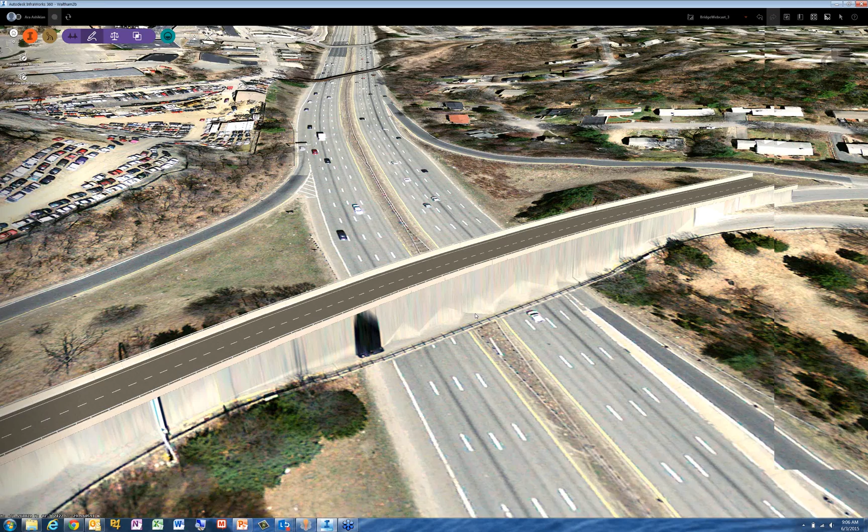So here we go, inside bridge design for InfraWorks 360. I'm going to switch over to InfraWorks now. Because of the lag on screen over the internet, I'm going to avoid moving around too much. Here is an InfraWorks 360 model. So what does that entail? InfraWorks 360 provides an in-context model so that you can see your project within the site model, aerial imagery, terrain elevation. You can also have LiDAR, all sorts of things to give you context. And we talk about it all the time, you design in context. Here, I quickly put a design road that's crossing this highway.

In today's presentation, let's have a look at what it means, or how do you actually model a bridge in context. So let's first of all select the road that's in front of us, and we will go to the toolbars at the top, and we have this bridge toolbar, and under the design mode we have two options. We can do precast I-girder bridges, or we can do steel plate girder bridges. Let's do a precast I-girder bridge, and you can hover over the road, and place the bridge where you want it to fit in the model.

So let's just drag it over, say something like this. Now, it's a rules-driven system, so when you place a bridge, InfraWorks tries to use reasonable assumptions that you as an engineer can modify, based on the span to depth ratios, which type of precast girder is suitable, or how many girders make sense, that an experienced bridge engineer would use. The model is in context.

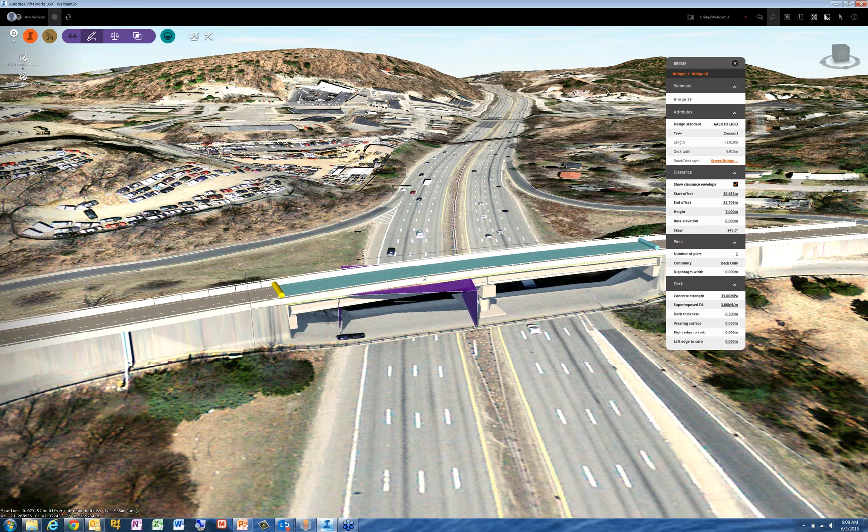Now, suppose we decide here that we want to actually have a higher clearance envelope for whatever reason. I'm going to change the clearance envelope, and in this case, we could go into the road, select the road, and change its vertical profile, or go in profile view and manipulate it. But we can simply click on the bridge and say, let's update the bridge's vertical profile so it respects the requirements of the clearance envelope. So here, this is just the starting steps. Let's turn that off for now.

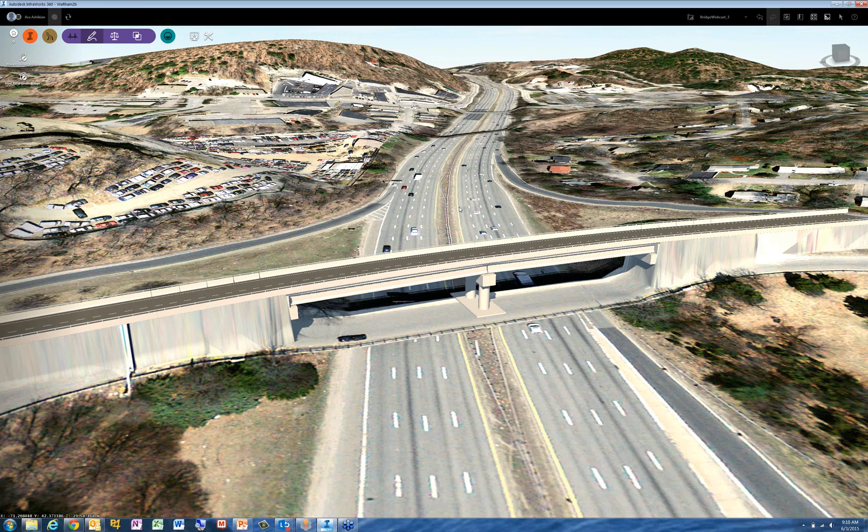Now, it's not just graphics. When we created the initial model, in this case, the default is precast I-girders. Let's toggle on deck transparency so we can have a better look at it. So we have a series of precast I-girders. If we want, we can go and view the quantities. So while you're modeling, InfraWorks is keeping track of all the key quantities for you. So if you change the number of girders, if you change the pier dimensions or layout, if you change the number of spans, if you change the type of girders, it's constantly recomputing all these quantities.

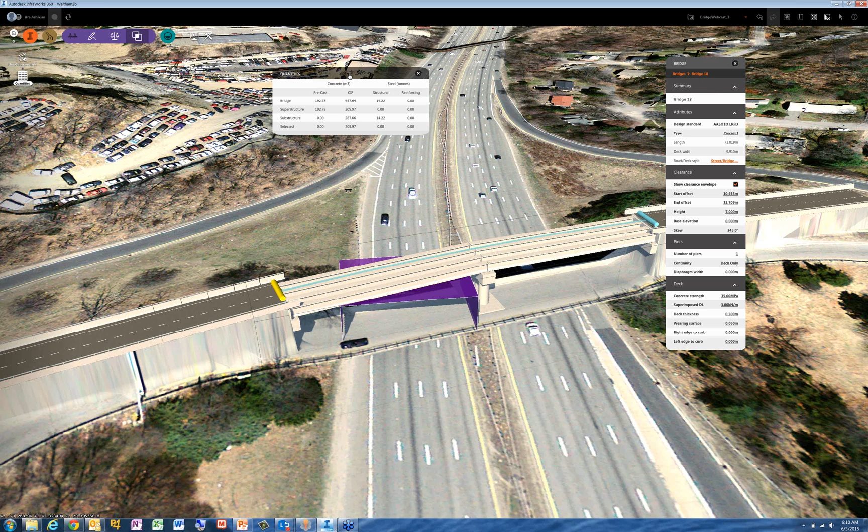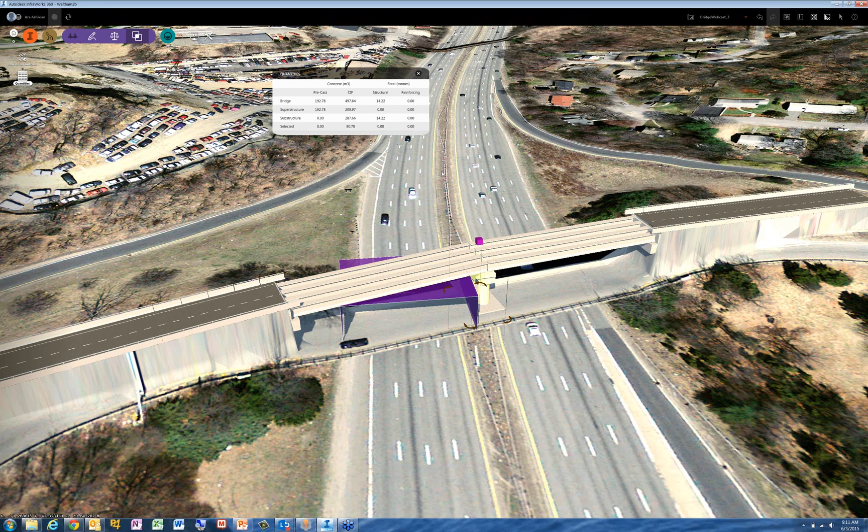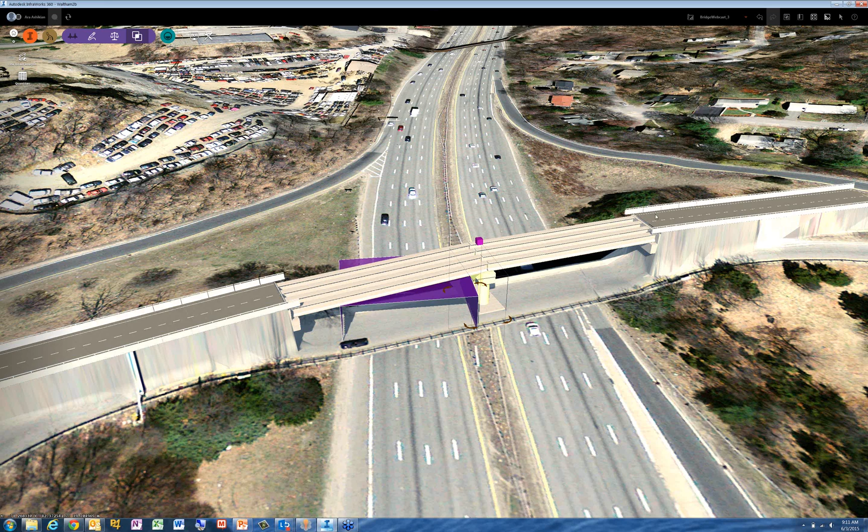So they're available for you, and they're divided into main categories: the precast versus cast-in-place concrete or structural steel, for the bridge as a whole, or for the superstructure versus the substructure, or if you select a specific element of the bridge, you can get its own breakdown. So that's always there, very handy. So you're modeling in context. It's keeping track of some of this information. It's rule-based so that a starting point is reasonable. So I'm going to turn that off for now. And again, let's turn off the clearance envelope.

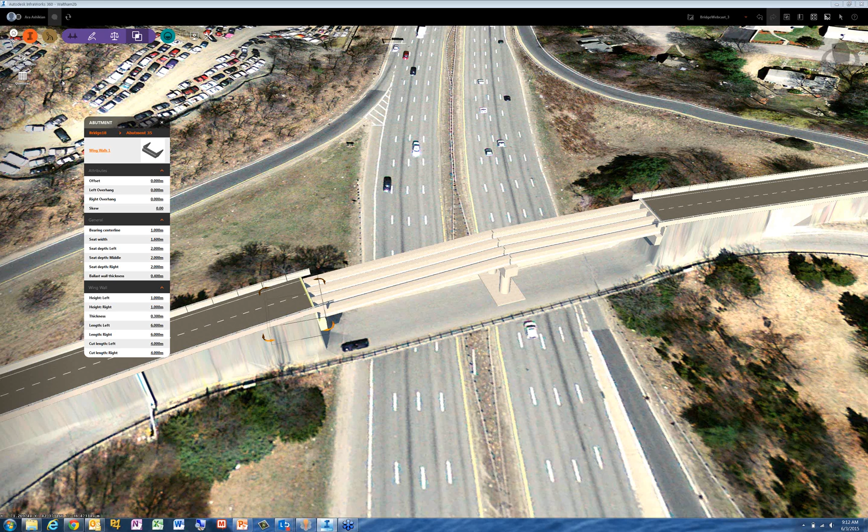And so here the pier isn't really quite where it should be. Or in fact, this first abutment, maybe we can pull the bridge in a bit. So once you place a bridge, you can always come back and manipulate it. So we're going to drag on this bridge gizmo and update the start of it. Let's also skew this abutment. In fact, this abutment is fully parametric as well. So if we were to put some terrain transparency on, we can see some of the abutment. It's a wing wall abutment in this case. Let's go in here and parametrically just change it a bit.

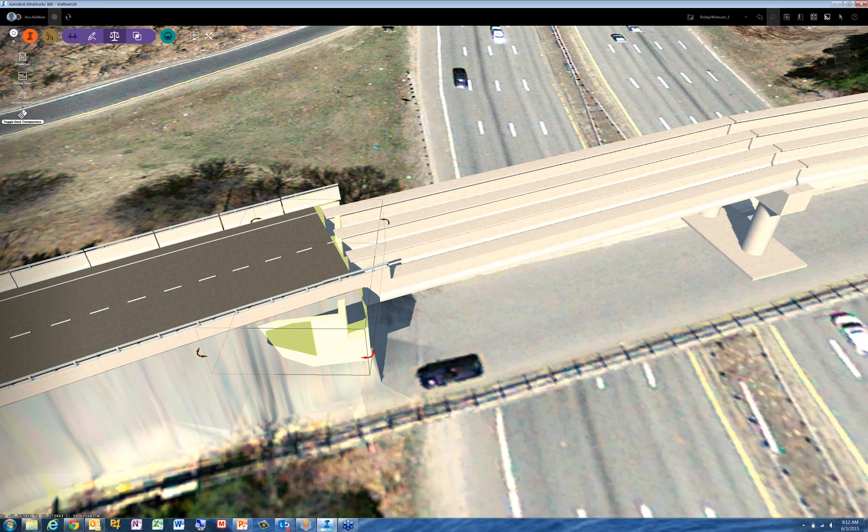In fact, we want to have an abutment that's acting as a retaining wall system as well. So let's extend the wing walls out a bit, and let's do that on both sides. So we can see the abutment a bit better now, and we can go in here and skew it so it aligns with the main road that it's crossing a bit better. We could also go in here and lengthen the wing walls. Let's say we make it 12 meters long on both sides, and let's make it go all the way down to the ground, so it's acting as a full retaining wall. So we could go in here and say it's something like 7 meters deep.

Now, an important thing to mention here is this is a parametric abutment, and we can click on it. You can see a larger image of it. But the parametric content, you as end users in the future will be able to add to it. So we have a product called Project Chameleon, which provides content at the moment in InfraWorks for all the drainage structures. In the future, it's also going to be made public so that bridge designers can add their own content, whether it's all sorts of abutments, piers, foundations, and many other bridge components. They all become fully parametric, and they expose their own dimensions. You as a content author can create as fancy as you want or as simple as you want, and you have full flexibility. So the modeling is going to be open. The in-canvas experience is going to remain, and you continue interacting with the model in an intuitive way.

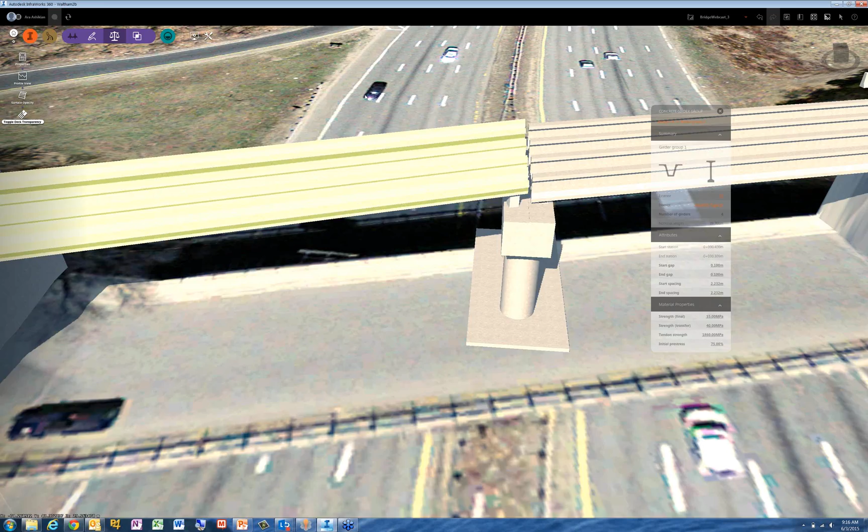Now, if we go on to the superstructure, we can see here the concrete girder group asset card, and it's indicating that by default it came up with an AASHTO Type 4 girder. You can go in there and you have a pretty comprehensive library of sections that you can choose instead of that. So if you wanted to have an Australian type of super T girder, you could switch to that. In different locations around the world, there are different common practices. I just switched the exterior girders to have this super T cross section. It could be something else as well.

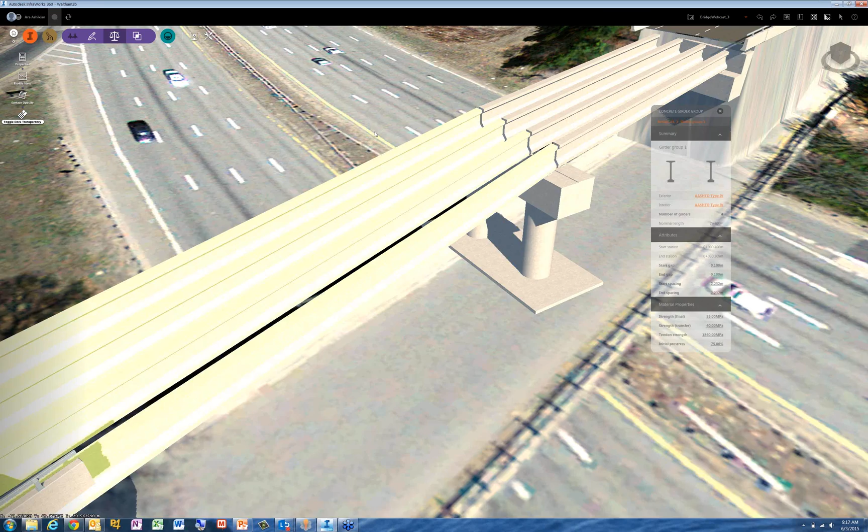So again, in the same way that you will in the future be able to add your own piers, abutments, and parametric foundations and so on, you can also in the future add your own girder geometries, and they will also be parametric. You can at any time undo what you did. So you have all those capabilities.

Also, when you select a girder group, you can select a specific girder and see its individual length. You could play with the lateral offset for each girder individually, so you can model more precisely what you're looking for, or at the group level, just play with the spacings between the girders.

Now, if we go to the bridge level asset card, we can play with the continuity of the piers. At the moment, it's set so that the reinforced concrete deck is continuous, but the girder is simply supported. So we have essentially two bearing lines over the pier. We could also say we want a continuous system where the deck and girders are continuous. Now we make that change, and it's going to update the model for us. We could keep it fully simply supported.

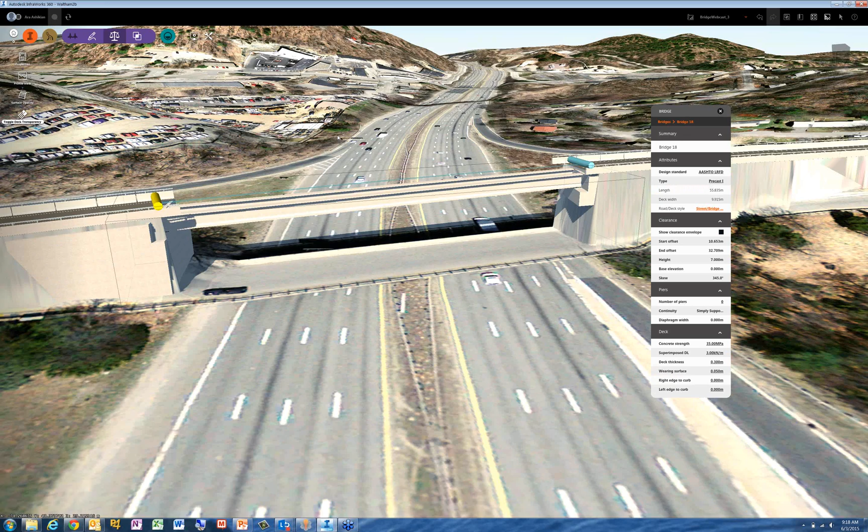If we were to delete this pier, it resulted in deeper girders and changed the girder size, so it respects a bit better the span to depth ratio.

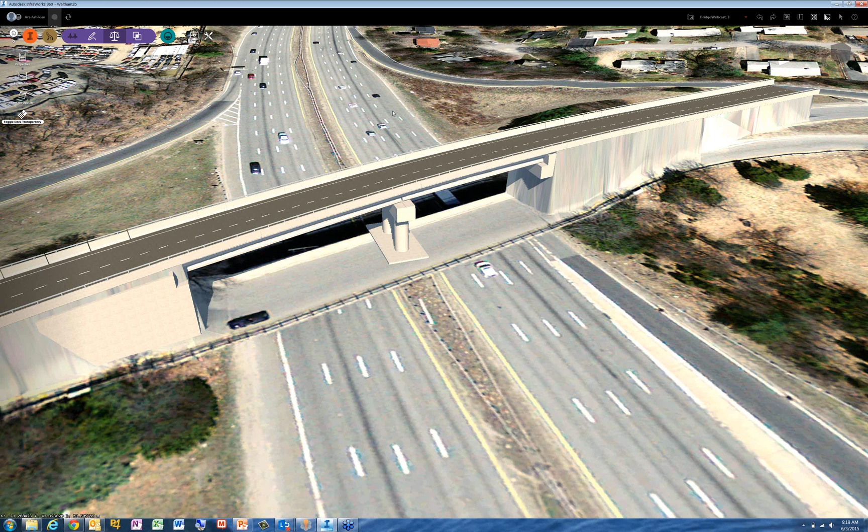We could also take this model into Civil 3D, the whole InfraWorks model or parts of it. In the last webcast, Charlie and Tim were showing how you can select in InfraWorks and have it exported to Civil 3D, where you can do detailed civil drawings. In the future, this same workflow will also be available so you can take this bridge into Revit. And in Revit, you would be able to do more structural drawings, construction details, add rebar to concrete components, and so on. So that's something that's coming up in a future release.

Now, we spent a few minutes here creating this bridge. We made sure it's tucked in nicely with the site. We looked at the clearance envelope. We looked at the abutments and skews and so on. And now it proposed different girder sizes based on reasonable proportions. And we can take that a bit further.

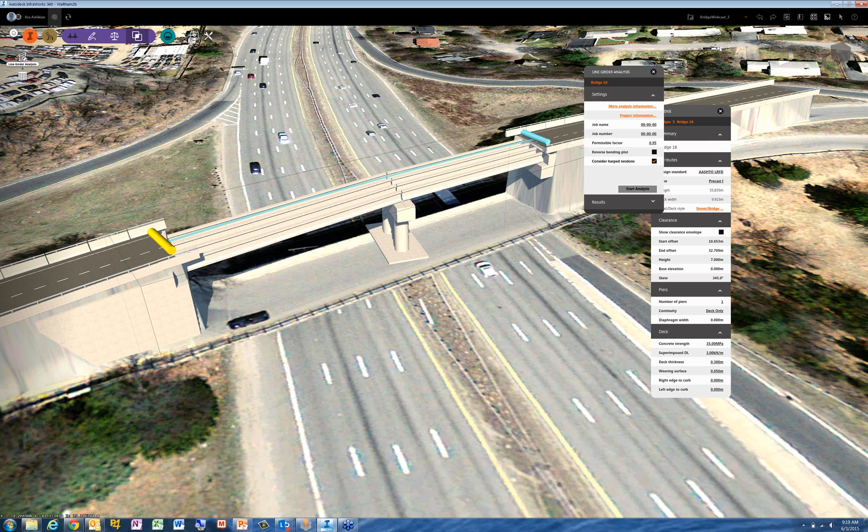If we select a bridge, we can go into this toolbar and this option called Line Girder Analysis. This is the first of a number of cloud services that we will be offering for bridges and structures in the future. What this allows you to do as an engineer is select your bridge and use the power of the cloud to do an analysis and code check to validate your pre-stressed girders.

Now, before we go straight into that, let's look at the bridge asset card here. You have different design standards you can pick from. This is leveraging a very powerful product called Autodesk Structural Bridge Design on the cloud. Autodesk Structural Bridge Design has been around for many years, and it's very well known for detailed analysis, design and code check of highway type bridges. And it supports a number of international design standards, including AASHTO and various Eurocode flavors.

So let's stick with the AASHTO code here. We select the bridge, and we can say start an analysis. This will trigger a cloud service, and it will look at all the girders at the same time in the cloud. When it's done, it's going to highlight all the girders. This line girder analysis is a beam line analysis. It's the first of many bridge analysis services.

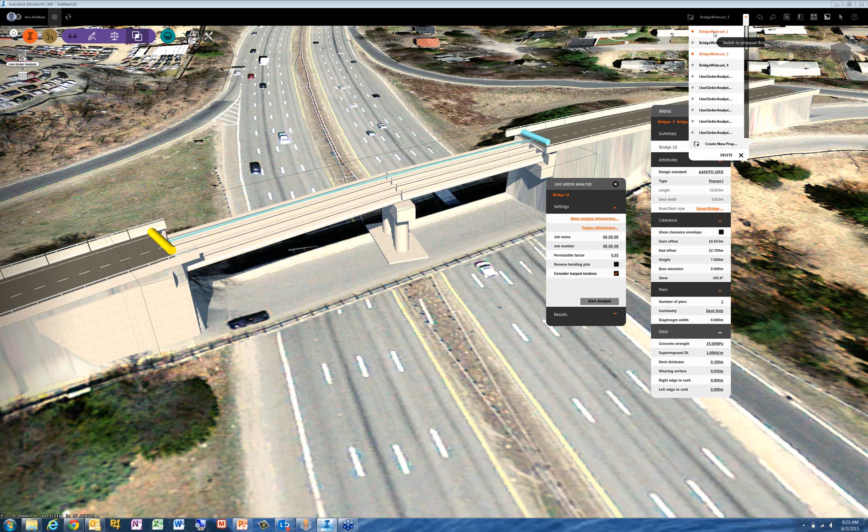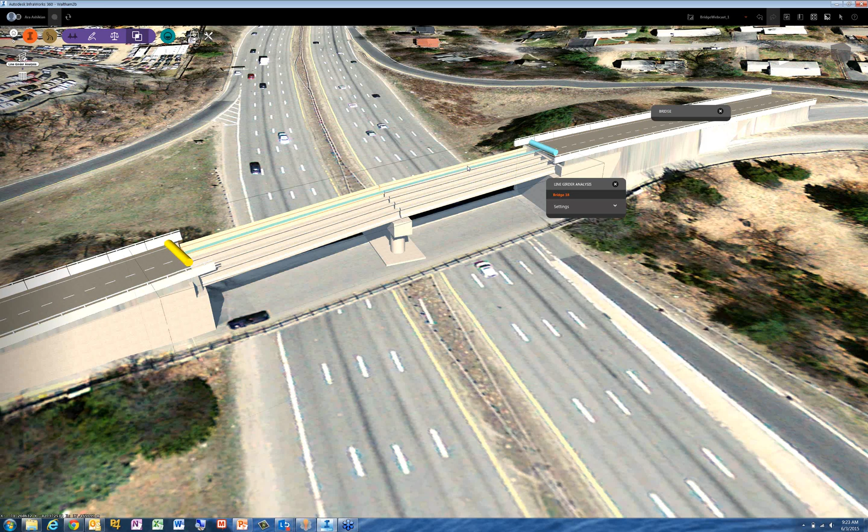Now, in light of the time and the fact that I have other things I want to walk through, I'm going to just pull up from a different proposal the same or similar bridge where I actually did run the cloud service. It can take 5-10 minutes or so on typical bridges, but here we have results. Now I'm going to rotate a bit more.

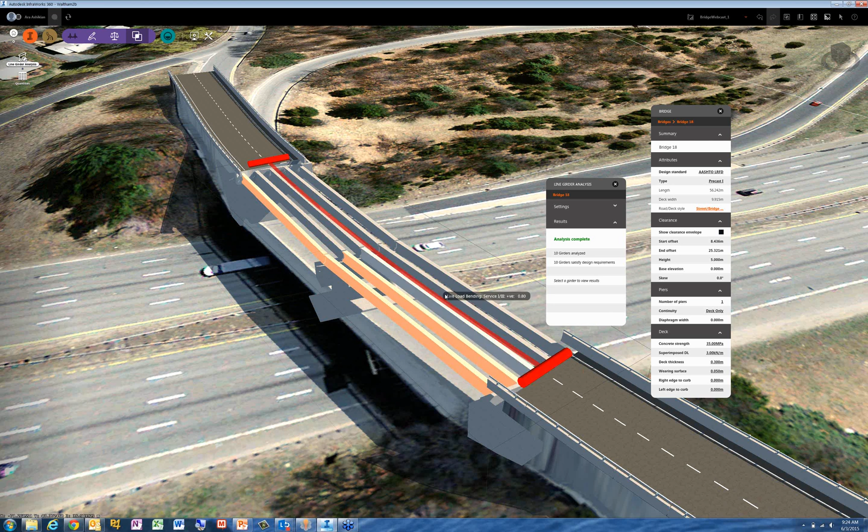You can see in this case the girders are color coded. If you hover over the girders, the results or the dominant or governing clause is highlighted. In this case, live load bending serviceability for positive bending is governing, and if you hover over all the girders, you can see. Now, if you were to select this specific girder, click on it, you would get this high-level summary of the design checks that it carried out.

So pre-stress transfer, erection stage, construction stage, that's in the casting of the deck, and live load bending, positive and negative, and so on, and the shear capacity. And this is what I was talking about earlier. You can go then just hover around, click on any specific girder, and view its high-level results, and make changes to the bridge. And when you're satisfied, you can go and get the full report. In the future, this will entail using cloud credits.

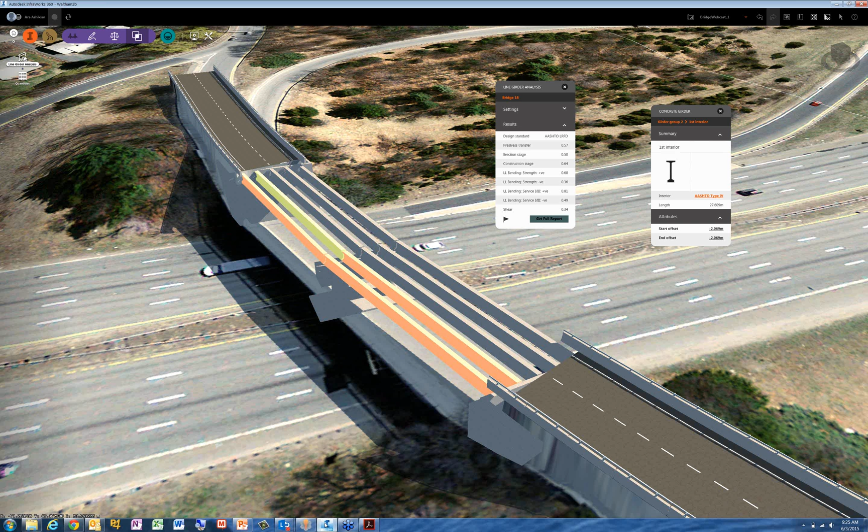For some reason, are you guys able to see the calculation report on the screen? It pulls up a... We just lost your screen. Screen is black. Yeah, okay. Oh, there it goes. It's back to InfraWorks now, right? Okay, here we go. So this is the report that it created. I guess GoToMeeting didn't transfer over to the PDF view nicely.

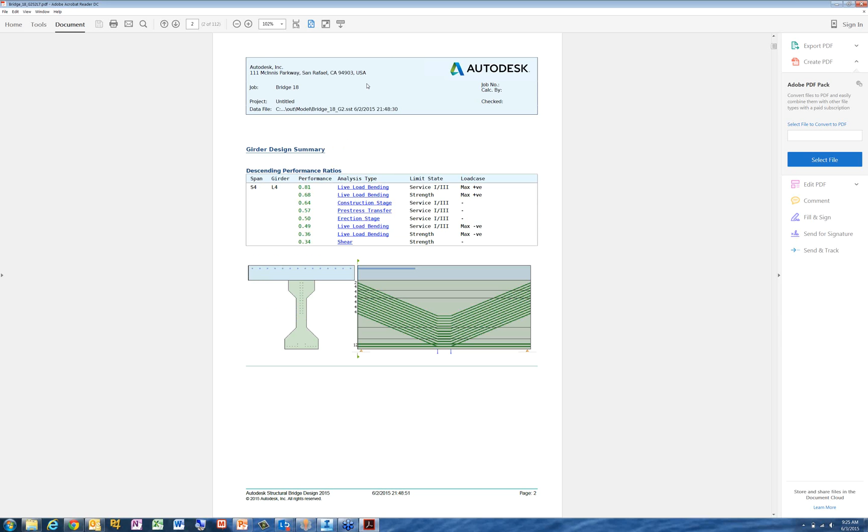So when you carry out line girder analysis, it creates a very detailed report. And you can see for this girder the pattern of strands that works, all the key stresses. And if you were to hover through it, you would see all the key diagrams, in this case live bending, and all the design calculations and clauses that were used in great detail. So all the equations that were used. So Autodesk Structural Bridge Design has very detailed documentation and you will get this for all the girders of the bridge.

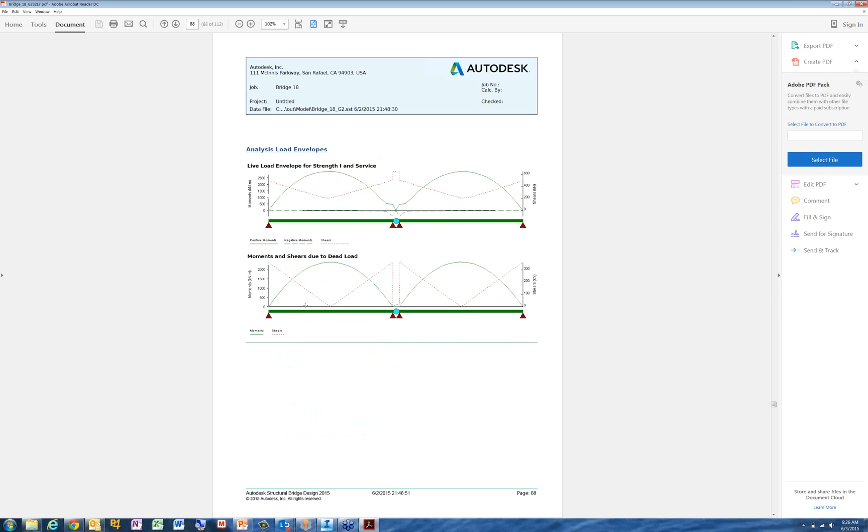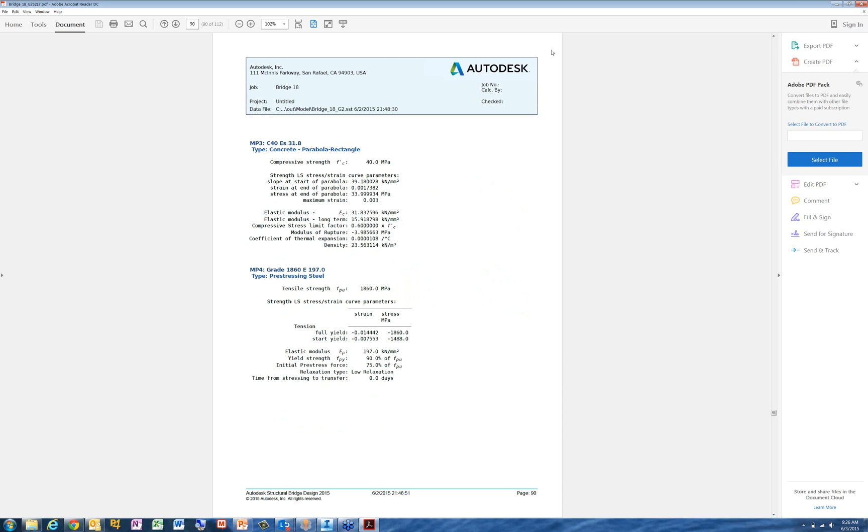You can jump over to overall diagram views or modeling aspects, how the line girder analysis was created, and save this with your project for future reference. When you create models in InfraWorks and you do line girder analysis, it will store this bridge along with its results once you purchase all the calculations in a proposal. So if you were to go back and make further changes to this bridge, you can always then access this previous run in a proposal by going up to the InfraWorks proposal menu and picking that.

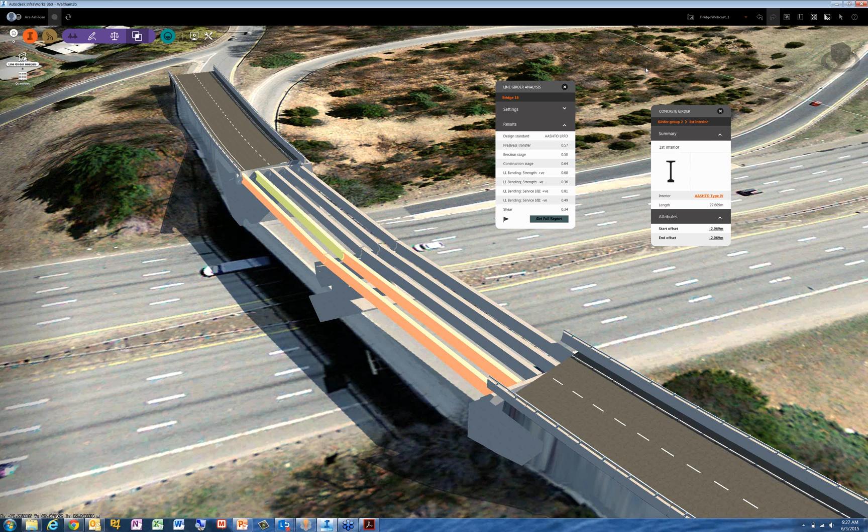So we really invite the users to try many different ideas, experiment, look at calculations. In the future, these cloud services will go beyond line girder analysis and include grillage analysis, so you have a 2D analysis of the deck system where you can account for effects of skew or curved in plan girders and so on a bit more efficiently than using design standards for lateral distributions. We will take that even further in the future with finite element models that we will extract from the InfraWorks bridges for more detailed assessments.

I'm going to close this off. So that's InfraWorks 360 as you have it in the upcoming June release, the current release. So it's the ability to design bridges in context, play with all the parameters of the bridge. I didn't spend too much time on foundations. You could play on with the foundations, change the number of piles, and so on and so forth, and get your quantities, get your analysis results.

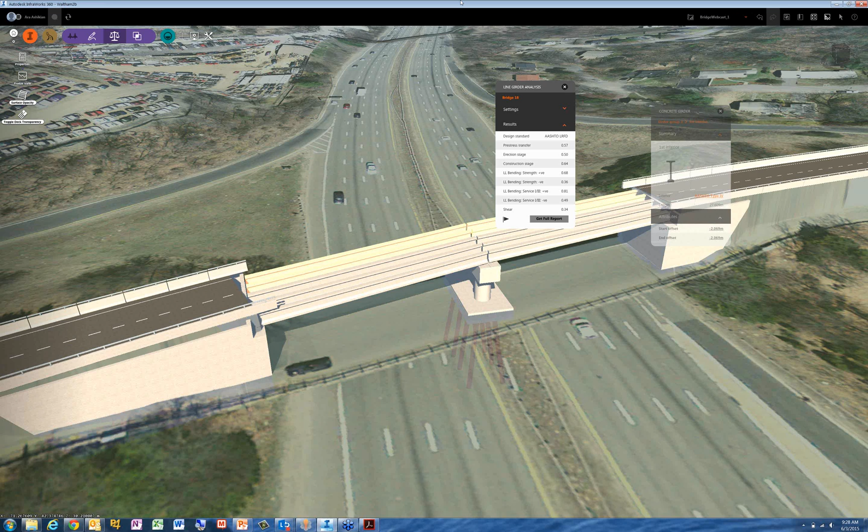And let's close this off. I'm going to load a work-in-progress version of InfraWorks just to show some of the things that are coming up, how we plan to extend this parametric modeling approach further with piers and foundations. And again, no promises as to the delivery of this, but we thought in today's presentation we would like to show you what we're talking about.

At the moment, the cloud service for the line girder analysis is for pre-stressed concrete girders. In the future, we will be expanding the steel girder modeling capabilities of InfraWorks and updating the cloud service for that.

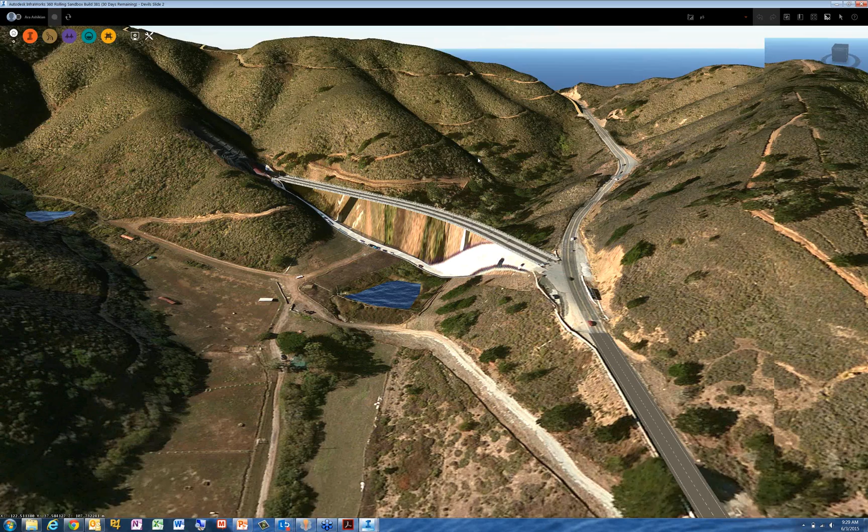So here we have a model of Devil's Slide in California. And let's suppose that we were lucky enough to win this project to design this bridge that's coming off from the Devil's Slide tunnel and joining the main road here. So let's zoom in a bit here. I just placed a road in here, and we want to add a bridge in this location. So once again, let's go into the bridge menu or toolbar, and in this case, let's try a steel girder bridge.

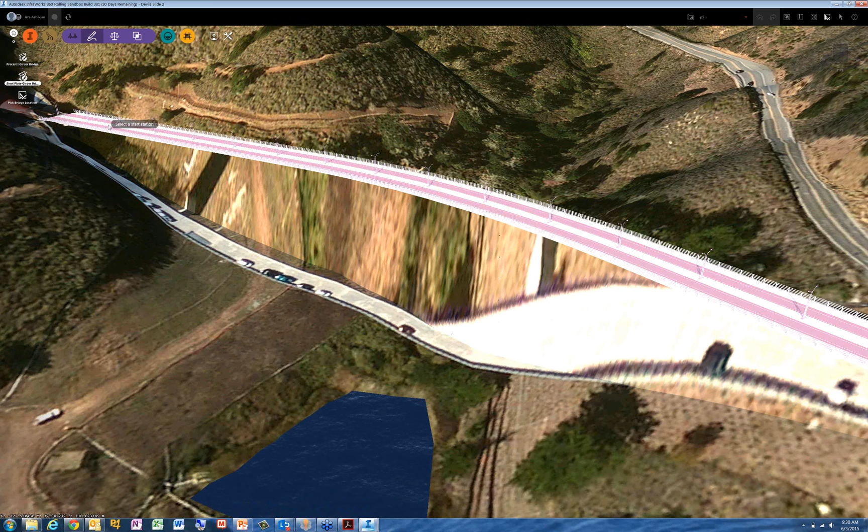So again, you just place it where you think it should go. You can always adjust the locations. So based on this bridge length of almost 250 meters, it came up with this configuration. What if we wanted to be a bit more daring?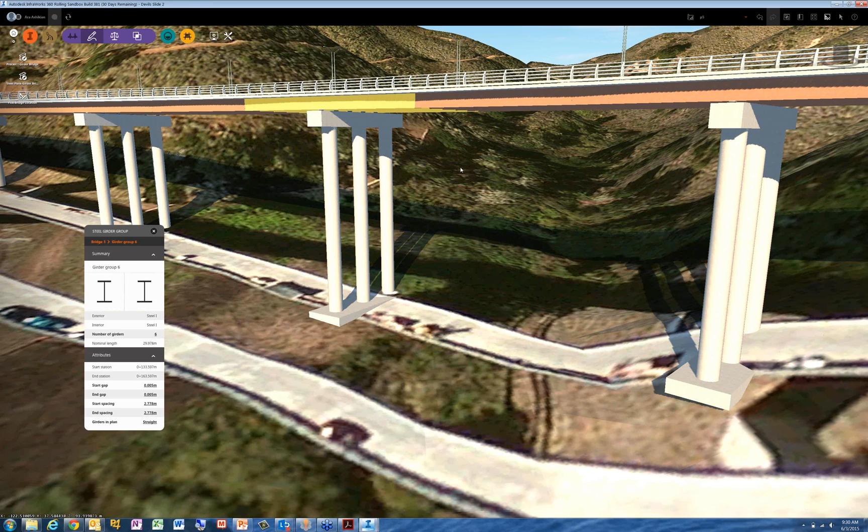Now, the steel plate girders, you can see they're kind of a weathered steel design, and they're continuous. You can see that you have different continuous segments over the piers and field splice segments in between. What if we wanted a more daring design with fewer piers? Let's say even just 2 piers. We can just go in and change the number of piers. Whoops, no, I changed the wrong asset card here. Hold on. Let's select the bridge and change its number of piers from 4 to 2.

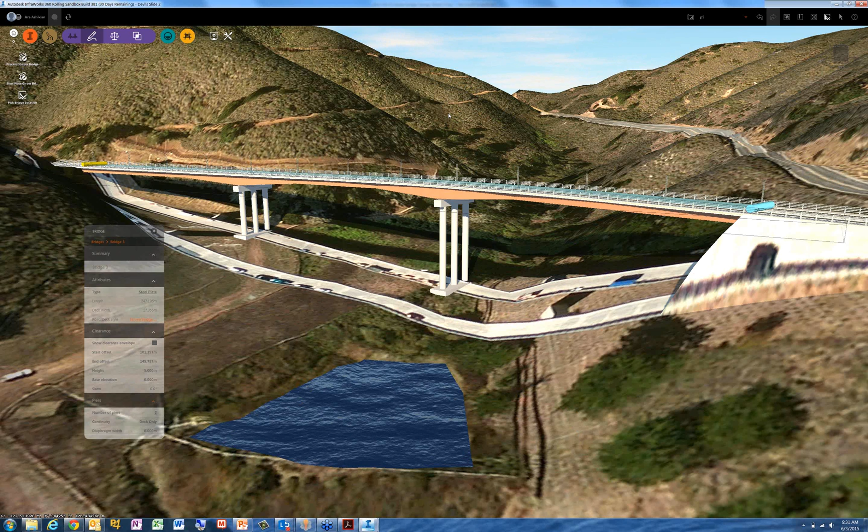You can see something interesting happen. The design rules behind the scenes recognize that for the corresponding spans, the user prefers to go variable depth plate girders when, in this case, the spans are over 80 meters. The default bridge that it creates has haunched steel plate girders. So you could carry on experimenting with steel plate girders.

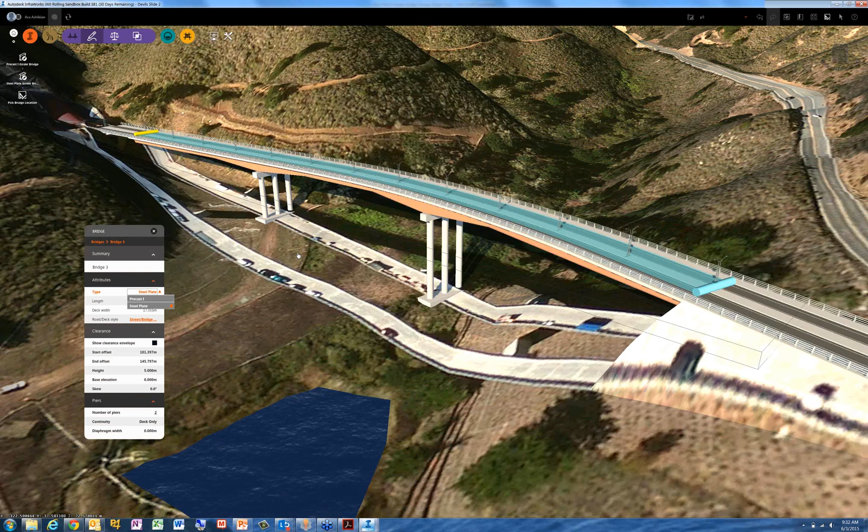You can go in here to the bridge asset card and switch back to precast I girders. There will be other bridge types coming up in the future. Today's versions are focusing on these. So here we have maybe a second alternative. So maybe you have a steel plate girder option, and you also want to consider a concrete bridge option.

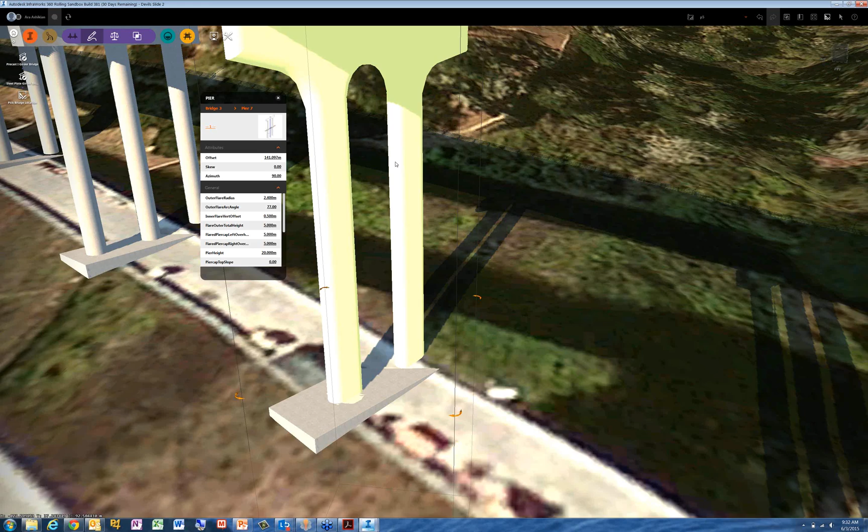Now, when we have these kind of default piers, maybe you don't like those piers, or maybe you want something which is a bit more architecturally elegant. You can define or pick from the catalog, which you can in the future add any number of pier types to. Let's say we want a pier that has a curved pier cap. So it's a kind of a more organic pier shape. You can see that.

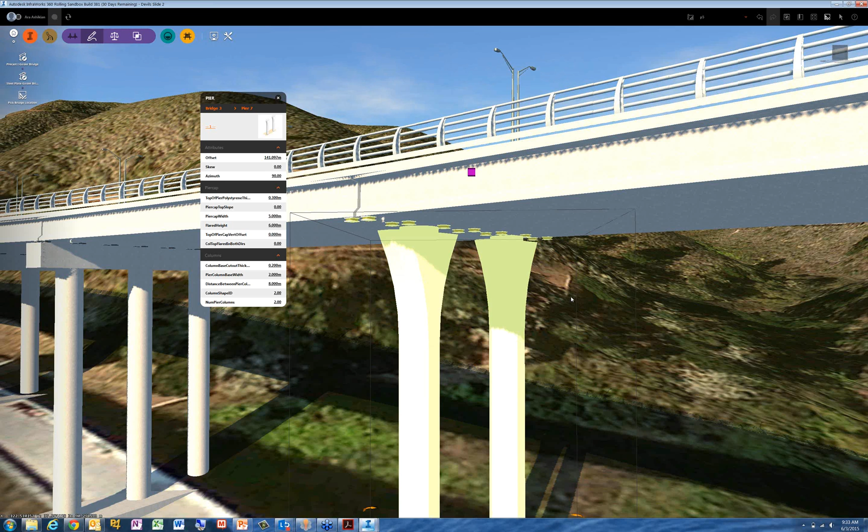Or let's say we want what's common in California, these flared piers. You can just select those, and if I highlight, you can see the shape a bit better. So these are octagonal flared piers. In fact, if you zoom in a bit better, a lot of the bridges in California have this detail of notching in the column base, and in this case, this is again a work in progress integral pier. The bearing shouldn't be there, but you can see here that you can have polystyrene at the very top, so you have a bit less stiffness at the cast in place joint.

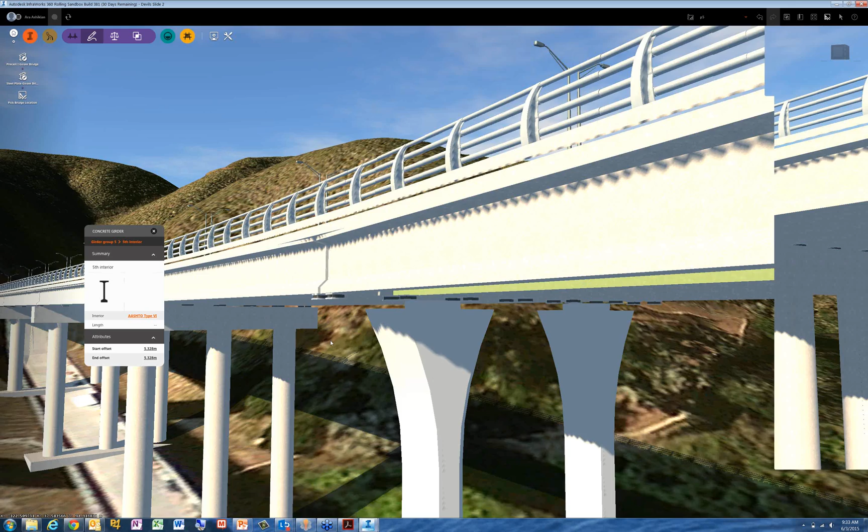But you can then select this pier and say, well, this is a fully parametric pier. InfraWorks itself doesn't need to know the inner details. You can really come up with very creative piers and towers and details. It exposes for you the parameters that are relevant in this case. Let's say we want to make the flared top a bit wider. So it exposes a pier cap width field for us.

Let's make that 8 meters, and let's make the length over which the flare goes a bit longer, so it's a bit smoother. And here you go. With just a few mouse clicks, you've changed this. And in fact, let's go in here and say we want 1 pier column instead of 2, and let's see what that looks like. 1, and let's make the section of the column a bit bigger.

So here we go. We switch with a few mouse clicks to, let's make it a bit wider, 3.5 meter diameter. You can really experiment with your design. All the while you're doing this, remember, all the quantities are being updated for you. And you can focus on the actual layout of the bridge or the assessment of the bridge and let InfraWorks do a lot of the computation for you.

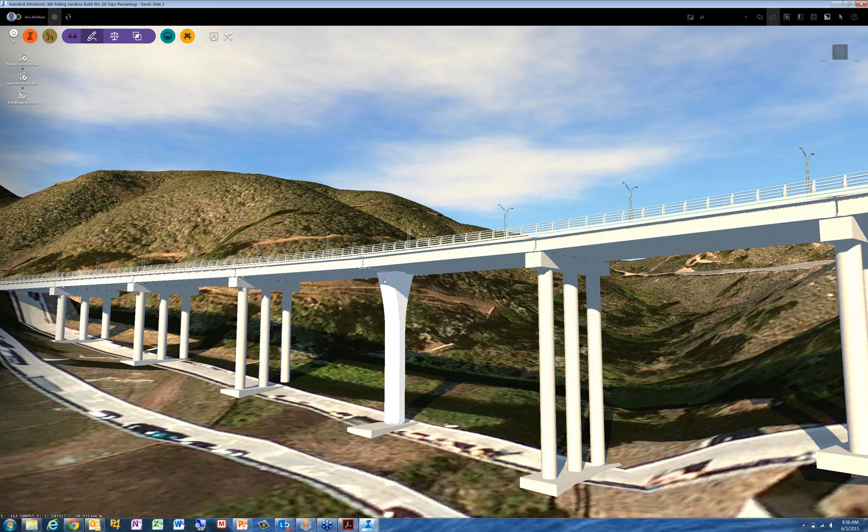Let's say, in this case, you wanted all the other piers to have the same look and feel. You want to respect the same flare height, but you want the rest of the pier to adjust according to its vertical height. Now, in the future release, you'll be able to select a pier or a foundation, for that matter, and quickly apply it to all the other components.

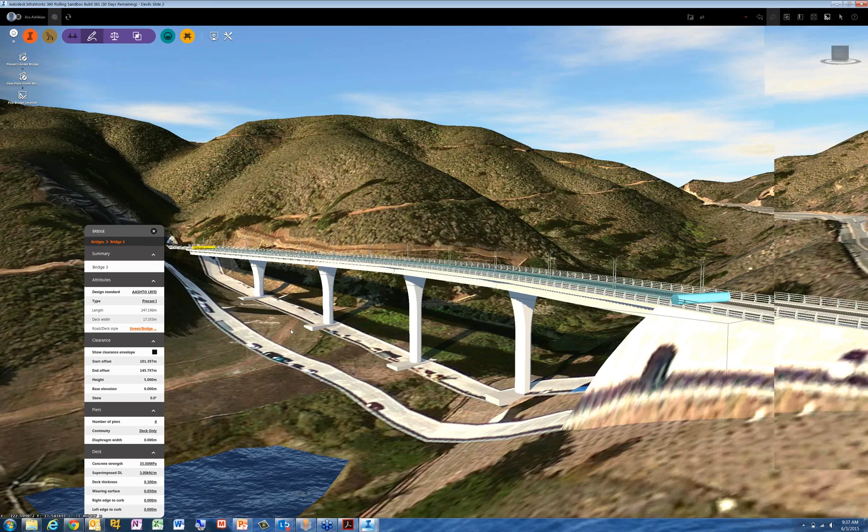So here you go. We have a pretty elegant looking concrete bridge with flared piers that you configured. In fact, I think we can do a bit better than 6 piers. Let's try to come up with a layout that considers 4 slightly longer spans, so it's less foundation work. Yeah, it's adjusting all of the details for you. In the same way that the abutments are parametric and the piers are going to be parametric and user-defined in the future, foundations have the same capability coming up.

So in this case, we have a slightly different piled pier cap that we can, let's say, raise a bit so we can see it better. Raise it to 3 meters. And maybe add a few more rows of piles. And if we look at this, we came up with a new foundation layout, and if we zoom in, you can see that it's a slope pile cap.

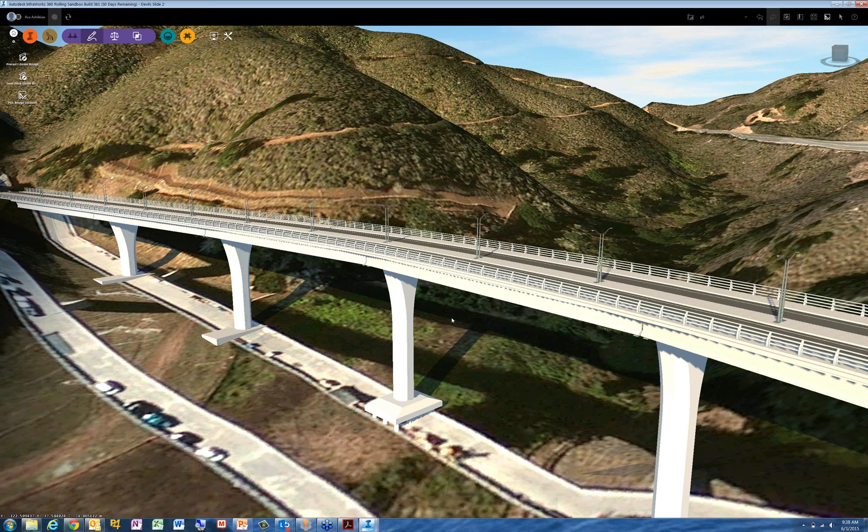Again, the point we're trying to make is use the InfraWorks in-canvas ability to model in context, move piers around, skew them to reflect all the constraints, and the actual complexity of the geometry is secondary, and it can be really as detailed or as simple as you want. All of this information will transfer over to Civil 3D and in the future to Revit. So it really opens up a lot of opportunity for creative bridge design, for intuitive bridge design.

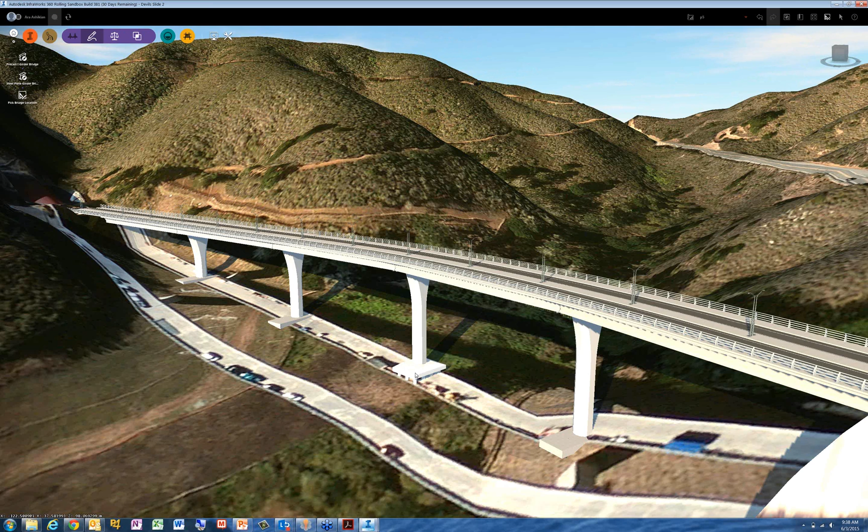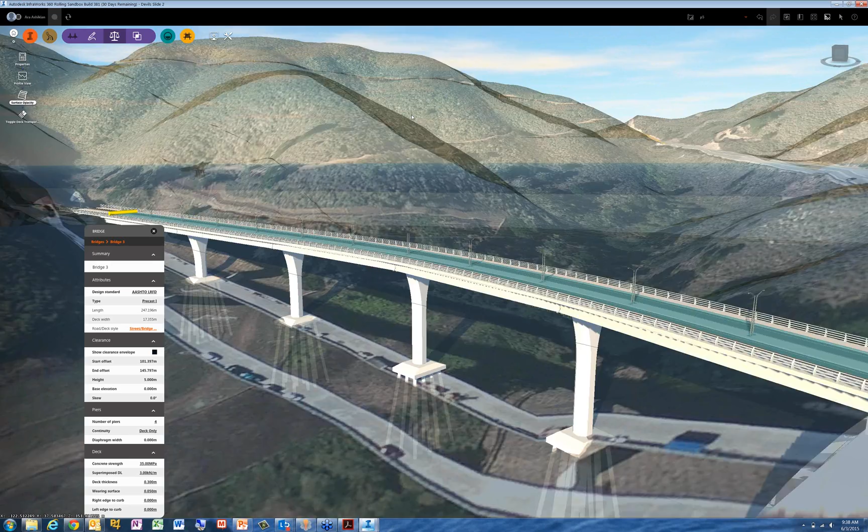And let's go one step further here and assign this to all the foundations. And if we were to make the terrain a bit less opaque, then we can see all of this. So let's take a step back and look at this.

In a few minutes, what we have done is, in the first model, we went in and put in a typical highway crossing bridge, played with the geometry and the layouts, used a cloud service to do some validation. This cloud service determined all the moments and shears for us based on the geometry, computed an initial layout of tendons for each pre-stressed girder that meets all the design requirements, in this case for AASHTO.

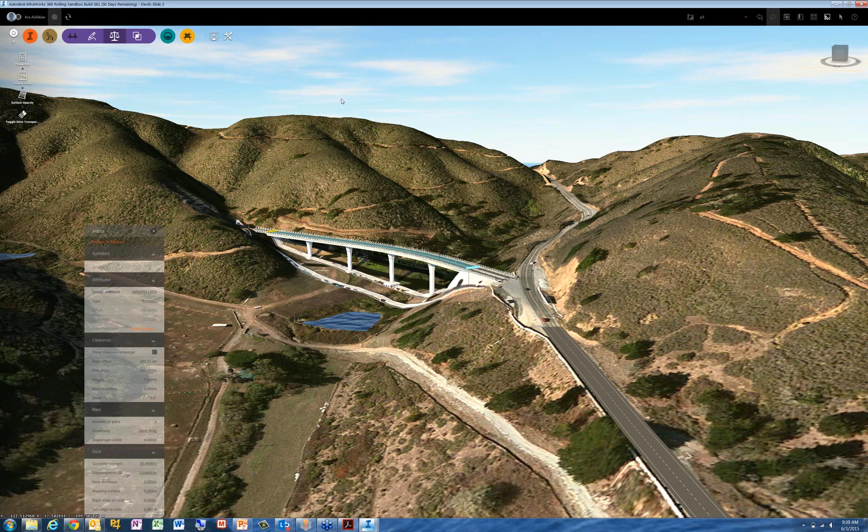Then we came over here and we added initially a steel bridge to this longer 250-meter long bridge and played with the number of piers, showed how the steel girders and the rules kick in and adjust all the proportions based on the user's preferences, and then carried on, switched over to a concrete bridge to show how you can really play with all the piers and foundations.

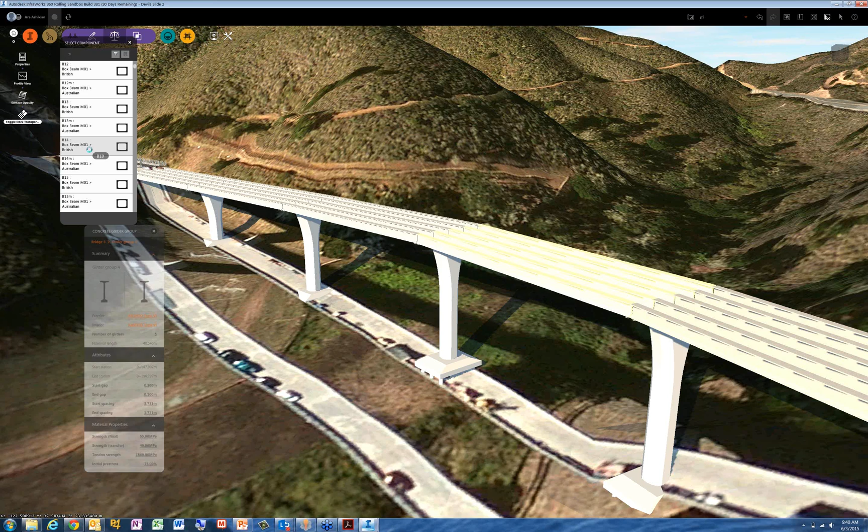Let's do one more thing here. Let's make the deck transparent. For this type of pier, really you want cast in place box girders. That's a future improvement coming up. Or, for now, let's switch over to pre-stressed concrete box girders. I'll just pick one of them here. Now, when I switch to box girders, it adjusted all the spacings for us so it makes sense. And let's suppose that we like this layout. Let's assign this to the entire bridge as well.

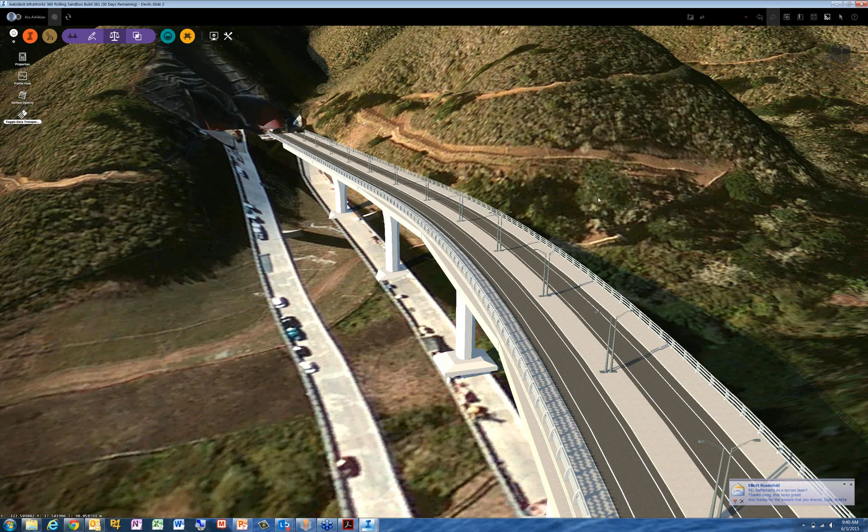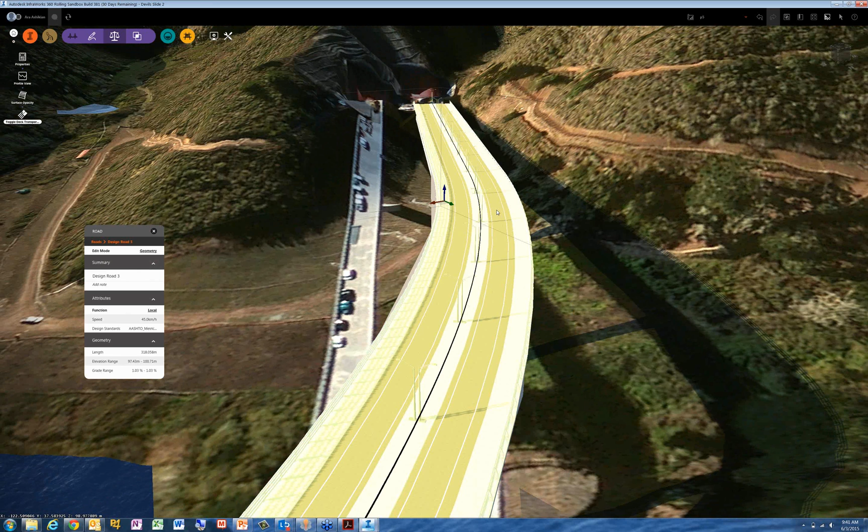So here we go. We have a pre-stressed concrete box girder bridge with flared pier columns. And then, if you don't like this type of alignment or barrier system or lighting system, you can go in here and with the bridge asset card switch to really a number of configurations that you can create.

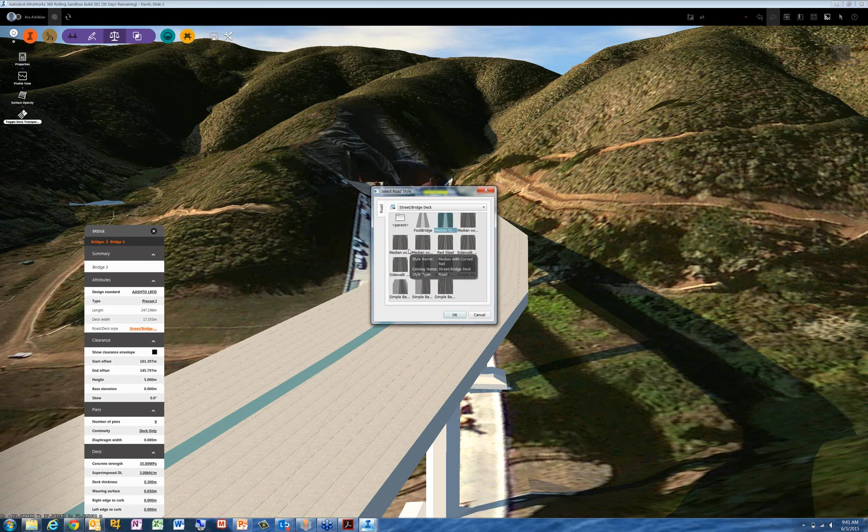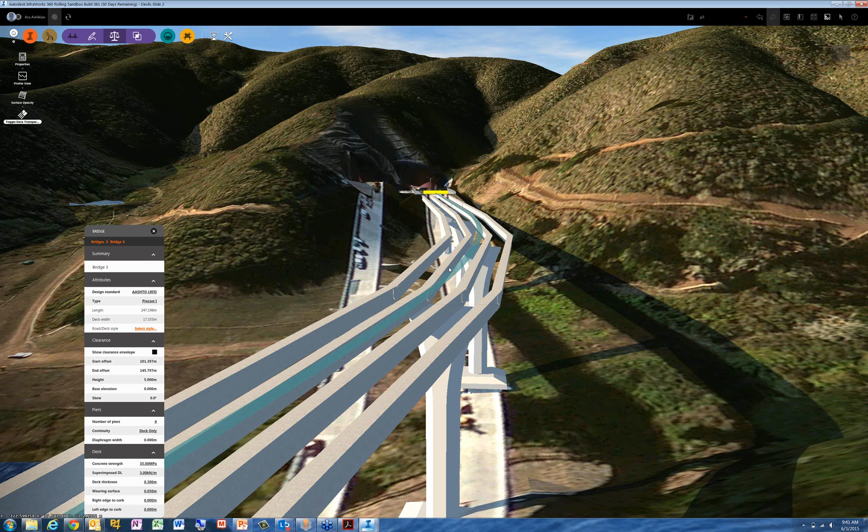And also, I haven't mentioned component-based roads here, but in InfraWorks you can use component-based roads where you can define lanes and sidewalks directly as opposed to using styles. So that's another option that's available.

So that concludes the live presentation for InfraWorks 360. I hope that you have a better idea of how you can use InfraWorks 360 and the bridge design capabilities to help you in your upcoming projects.